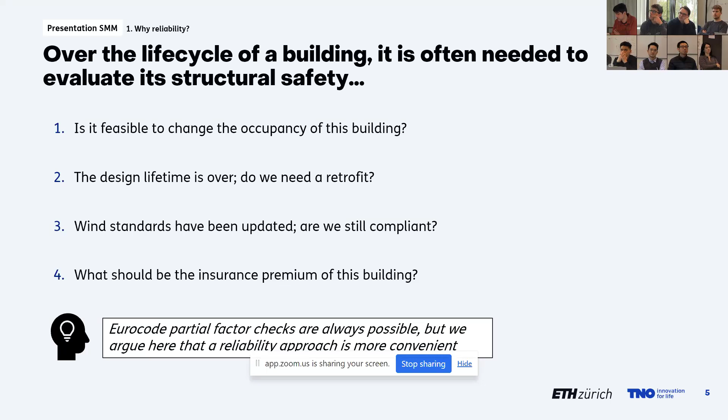So with the Eurocode approach, for instance, partial factor checks are always possible, but what we argue here is that a reliability approach is more convenient for reasons that I will explain. For those that are not very familiar with reliability analysis, here are some principles. The parameters that influence structural safety, materials and loads, are all uncertain, either because of their inherent randomness or because of our lack of knowledge about them, and we have to deal with that.

What is the size of the overlap? This is a representation, by the way. The area is not precisely the probability of failure, but it's a way of representing the overlap. If they are very close to each other, the overlap will be big and the reliability will be low, and the opposite if they are very far apart or they have a low spread.

Okay, but then why not just apply partial factor checks? So one explanation is that partial factors are calibrated across a broad range of cases, so Eurocode partial factors, for instance, and this creates a wide scatter in the reliability.

You can see that if you apply the exact partial factor by the Eurocode, you end up having very different results. So passing a unity check does not guarantee adequate safety in either direction.

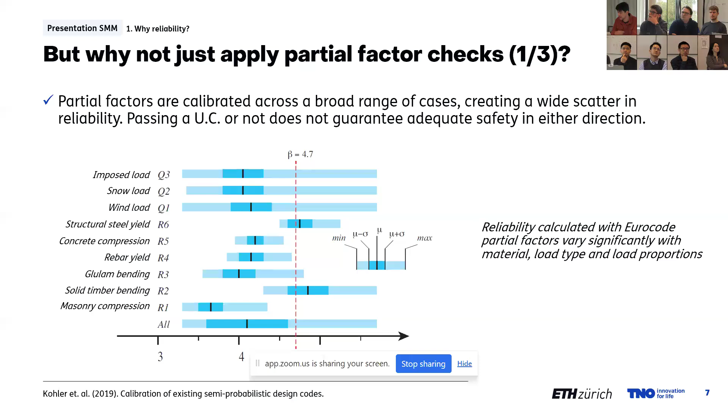And even more interesting, a probability of failure is something that can be monetized. So if you have a probability of failure and then you have a consequence of failure, you multiply them and you get a risk cost. And then you can compare this with the cost of making improvements in the buildings. So then you have risk-based optimization. So probability of failure allows us to get this.

And finally, and perhaps more interesting, is that extra information can be used for reliability updating via Bayesian analysis. So the information that you have can be used to refine the input parameters via the Bayes theorem. And with this, you have a reliability before observing the data and a reliability after observing the data. So it's a very consistent way of incorporating this information.

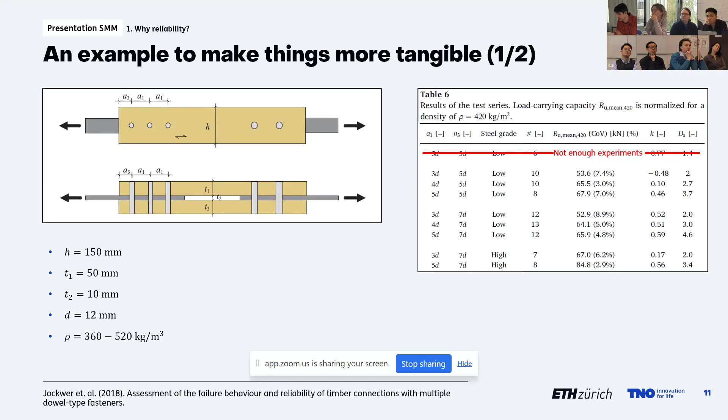And here are more data about it, but they went from 7 tests up to 13 tests. And they capture both the mean and the coefficient of variation. So this gives us valuable information to characterize the distribution. And our goal here is to use this data to compare the Eurocode resistance versus a reliability-based interpretation of the experiments of this paper. So to see if we can do better than the Eurocode resistance.

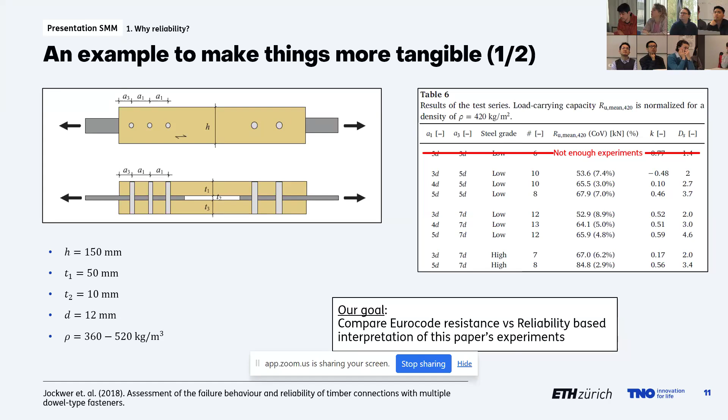The procedure is the following. So on one hand, we use the Eurocode 5 formulas to calculate the design resistance of this connection. We transform the experimental mean and coefficient of variation to log scale parameters because we consider this resistance as a lognormal random variable. We use Bayesian inference and experimental data to obtain the predictive distribution. In this case, it's a conjugate prior case, so we can easily do Bayesian inference.

And we follow the approach by the Eurocode. So in the background document of the Eurocode, they specify how one sets design resistance. And it's associated with a certain reliability index and a certain influence factor. So we apply this approach, but we use the resistance that we have obtained from our experimental results.

And the idea is that if the ratio between the empirical resistance obtained in this way versus the one in the Eurocode is above 1, well, this means that the Eurocode formulas are more conservative than what their target level says. And this is indeed the case. So for all the cases that I showed before, there is quite a big ratio, quite above 1. So from 1.34 to 2.01, so it means from 34% higher up to 100%.

So information, well, this is in parallel to one of the previous slides that I showed. The information in buildings can be differently distributed and it's also sparse. So in one building, you can have maintenance records and visual inspections and material testing, but on others, maybe you only have access to the load history, but then nothing else. So we need a way to use this information so that we can complement what we know from one building to others, and we can draw interesting conclusions.

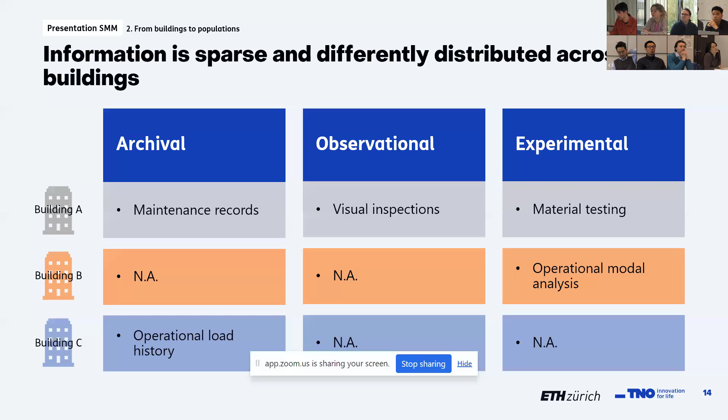So this goes by recognizing that buildings are not unique prototypes. So even though they can look different, they can share structural typologies, material types, loading environments, and so on. So the population of structurally similar buildings can be much richer informationally than individually. So the idea would be to mathematically transfer what we learned from this sparse building data to the entire population. Of course, buildings are very heterogeneous, so this is not a trivial problem. We will have to tackle this.

And I'm an external PhD. I'm matriculated here at the ETH. I'm employed by TNO still. I'll be alternating between Delft and Zurich, and my supervisor is Eleni, of course, but also Professor Raphael Steenbergen. He's my colleague at TNO. He will be my company supervisor, but also he's at a university in Belgium.

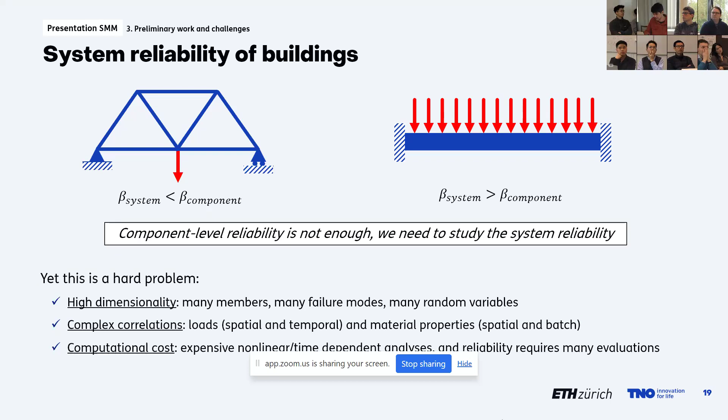We also have complex correlations. So we know that loads are correlated spatially, but also temporally. Material properties also have spatial correlation. They have degradation. They have batch correlations as well. And it's not always obvious how to model them. There's a lot of engineering judgment in defining them. There is some work by the JCSS probabilistic model code, but still it is not a closed matter.

And finally, we also have a large computational cost. So we can have expensive analysis, which can be nonlinear, which can be time dependent, or maybe a combination of both. And as you know, reliability analysis requires many evaluations of the same structure with different realizations of parameters.

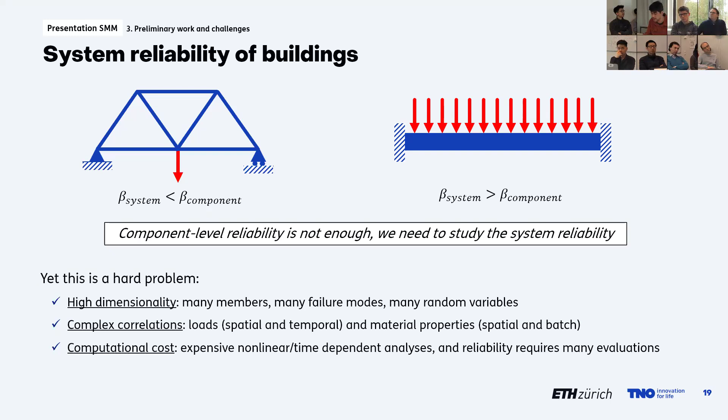And we designed the cross sections of this concrete frame so that the unity check under the Eurocode is close to 1. So we designed the dimensions of the cross sections and the rebar so that it's close to 1. This ended up giving us 671 correlated random variables. I will not go into more details about how the correlation structure is considered, but they are correlated.

And some results about this. The reliability associated with any cross-section yielding here is 3.49. And the reliability associated with the most critical cross-section in isolation is a bit higher, of course. It's closer to 4.07. Since we designed this building to follow the Eurocode, the target in this case was 3.8. So it's not that far from that value.

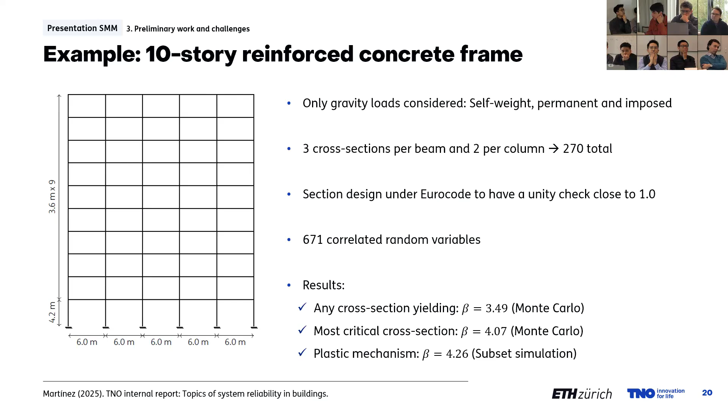Some ideas to go towards efficient system reliability. So we already, in this case, solved it with the subset simulation, but an interesting approach, and that is quite easy to implement actually, is to do a sort of two-stage Monte Carlo simulation. The idea is to use cheap linear elastic analysis to filter the safe realizations. And then only on those that are not filtered, you run the expensive nonlinear analysis on that tail.

So for instance, you start with 10 million samples, and then the check associated with any cross-section yield, which was 3.49. This is only a tiny probability of that occurring, so 0.024%. So this means that from those 10 million samples, only 2,400 samples demand a nonlinear analysis. And then for those, checking this reliability index, you end up having only 100 samples that have a plastic

mechanism form. So this is a simple approach that can be taken if the typology of structure allows you to run this cheap linear elastic analysis. For instance, if you don't have any buckling phenomena, then you can easily do this and it can be efficient.

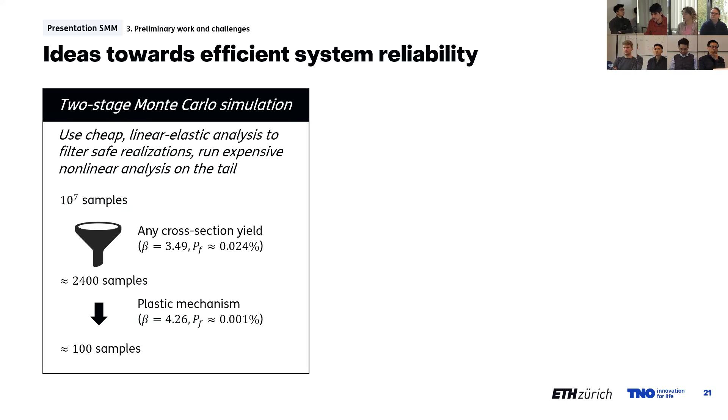Then going to perhaps more interesting approaches is to use a high dimensional model. High dimensional because we need to tackle hundreds, if not thousands, of random variables. One idea is to do dimensionality reduction first, and then to use a machine learning surrogate, so some sort of PCA, and then complement it with Gaussian processes or something like that.

But another way of seeing the problem is to, for instance, use a graph-based surrogate, and in this way, you can also encode the topology of your structure. So you can train one network that is able to make predictions for different configurations of structures. And as I showed in my example before, buildings are quite keen to be represented by graphs.

So a joint can be a node, an element can be an edge, and then you can find a way also to deal with two-dimensional elements such as slabs, polygons. So this is also another approach that could be taken. Of course, we have not actually worked on implementing any of these, but these are some ideas that we have at the beginning usually.

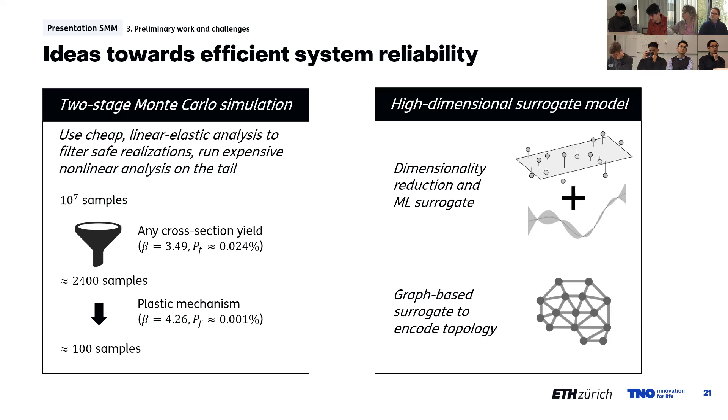So one way that researchers have tackled this is with the use of variational inference, very popular in the machine learning literature. It's approximate, but it's faster. And this frames the problem not in terms of sampling as in MCMC, but in terms of optimization. So you optimize the parameters so that you are similar to the posterior that you are looking to obtain. But still, it's data set dependent.

So there is a third, you can say, paradigm on Bayesian inference, which is amortized inference. So the idea here, borrowing again from machine learning and specifically from normalizing flows, you train once and then you can obtain fast inference for new observations that you have. So you train once with the simulations with the data generating process that you have, and you can obtain instantaneous inference. And it's Bayesian inference.

And we have experimented with amortized inference in the past. Here we have an example. Here's a small scale bridge that we have at TNO. It's a 1.5 meter structure. It's a truss structure, as you can see. We have a little car that goes from left to right, and we also have some sensors there, and we can obtain the influence lines of this little car for each of the sensors that we have.

And the interesting thing about this bridge also is that damage can be simulated. So we have some pieces that are identical to these blue ones that you're seeing there, but they have a smaller Young modulus, and in that way we can simulate damage if damage can be interpreted as a reduction of the Young modulus. So we use this as a case study for model-based damage detection via amortized inference.

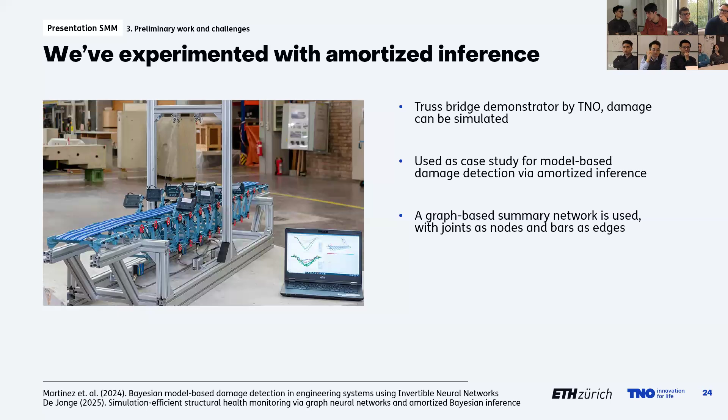We started with that work, and then we had a master thesis intern that, on top of what we have developed in the past, added a graph-based summary network, the thing that I presented before, representing the joints of these truss structures as nodes and the bars as edges. And what we saw is that there was a strong performance across multiple damage cases. So using the graph structure gave us better results than not using them.

And an interesting approach also could be to amortize over the topology as well, because this is possible in amortized inference. You can amortize over the number of samples, over the number of observations that you will have, over the locations of sensors that you may need, and in this case, even over the topology of the structure that you're considering.

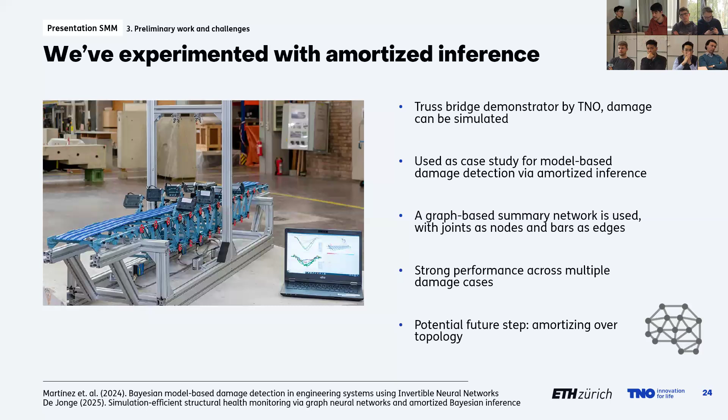And finally, moving to the third part, the last challenge that I will be talking about today is how to share information across building structures. So for this, we have two previous studies at TNO. One from a colleague, the one on the left, focuses on the reliability of slab floors using a population track record. Track record means the fact that it has survived for many years with operational loads.

And this study was done because in the Netherlands we suddenly had a catastrophic failure of some concrete slabs that were very used in parking lot buildings. So structural failures, the collapse of the actual structure, and there was a necessity of evaluating if there needed to be a massive retrofit campaign in thousands of buildings. But using this population track record concept, they were able to minimize the actual retrofits that needed to be done. So the populations here were determined manually by the analysts.

By engineering judgment, they say, okay, these floor slabs, I'm going to group them in one population, and then, for instance, if you have a different thickness, this will go to another population. So it works completely separated, and that worked fine for that application.

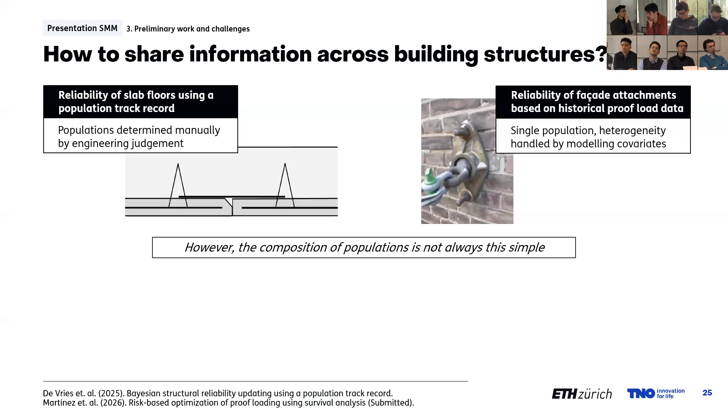So the thing is that the composition of populations might not always be as simple as in these two cases that I have described before. So we need to construct the population in a more sophisticated way for heterogeneous buildings. So some ideas here for handling more complex population structures. One way of doing it is by hierarchical Bayesian modeling. This is very powerful if you know the full data generating process. If you have a lot of knowledge about the thing that you're describing, then you can use hierarchical Bayesian models.

Another approach, more from the machine learning perspective, is to somehow measure the similarity between the two buildings that are being analyzed, and then apply some transfer learning. And finally, perhaps a hierarchy can be automatically learned from the data if you have enough. So somehow maybe you can learn that hierarchy.

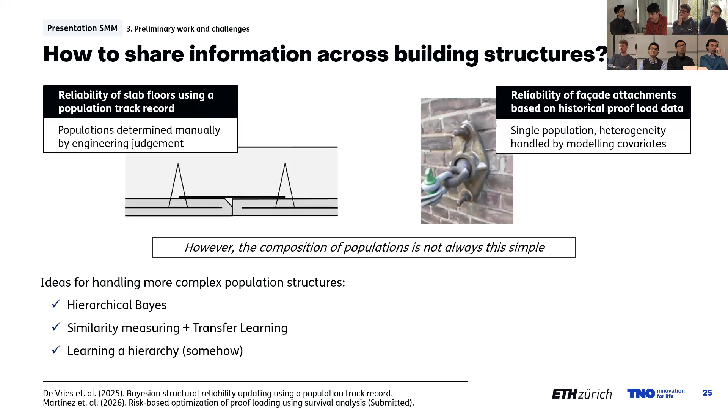But I talk about the data because for this project we will have access to quite a rich data set of vibration-based monitoring data for Dutch high-rise buildings. This belongs to a consortium. It's not directly related to this PhD, but we will get access to the data. So we have on the top long-term campaigns that have been done in these buildings with accelerometers. They have extracted frequencies and mode shapes, and also short-term monitoring data that maybe spans 1 or 2 days.

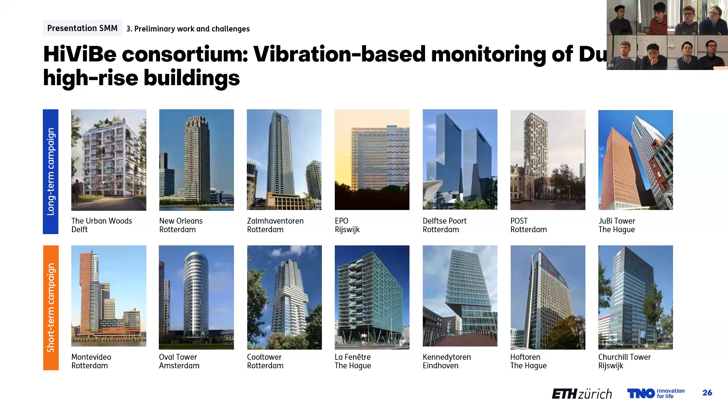So this is very interesting because all of these buildings are very different. The data that you obtain in each building is different, but we think that it can be of great use for a population level approach. And one interesting thing that we'll probably discuss with Eleni and Rafael afterwards is what research sequence to follow in this PhD.

Because on one hand, we can do a bottom-up approach and first study well what reliability means for timber buildings, then move on to Bayesian updating, and then move on to a population level approach. So this is, let's say, a logical way of approaching it, because each stage produces the tools and intuitions that you may need. You learn what matters mechanically before moving to the next stage, but you can also do it the other way around.

So you can always start from a population level approach, and you can discover early how precise or how detailed your models need to be so that you can draw interesting population level conclusions. So it's possible that some coarse models may suffice if you pool across a large number of structures. This is more a question for the audience. We have not made a decision of how to proceed, but I just wanted to leave it there.

Just to finalize the presentation. We discussed why follow a reliability approach. In summary, because it eliminates the false certainty of pass and fail unit checks. It provides an actionable metric, for instance, allowing risk-based optimization, and it integrates new information via Bayesian inference, or it allows you to do that.